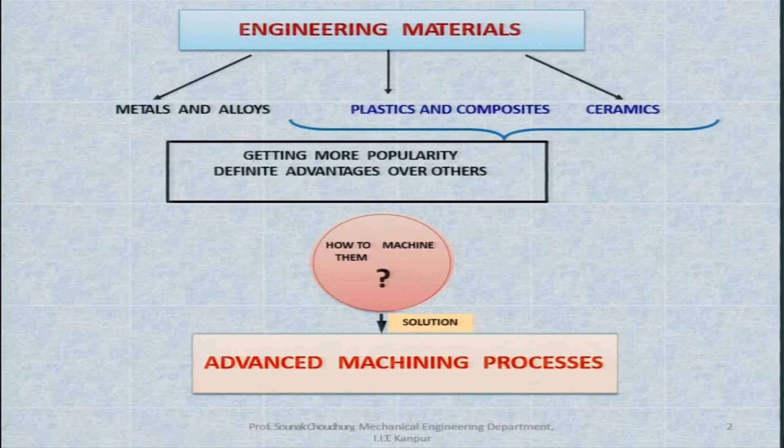So the solution that has been thought of is advanced machining processes - machining processes with some advanced technology or advanced concept of removal of extra material. When we talk about advanced machining processes, we are still removing excess material like in conventional machining. It is also a metal removal process, but there will not be any direct contact between the tool and the workpiece. This is the basic characteristic of advanced machining processes.

The second basic characteristic is that there could be different kinds of energies that we can use, apart from mechanical energy. Let us see it here.

Present day demand trends in industries like aerospace, missiles, automobiles, nuclear reactors, etc., require engineering materials with much superior properties - for example, ultra high strength, hardness, and very high temperature resistance. Such materials with these properties are very difficult to machine by conventional methods, indeed.

Now, what is happening is the workpiece material hardness is becoming much more than existing tool materials. We have certain limitations in tool material so far. When we have materials with much superior properties, the workpiece material hardness is becoming much more than the tool material hardness. So how to solve this problem?

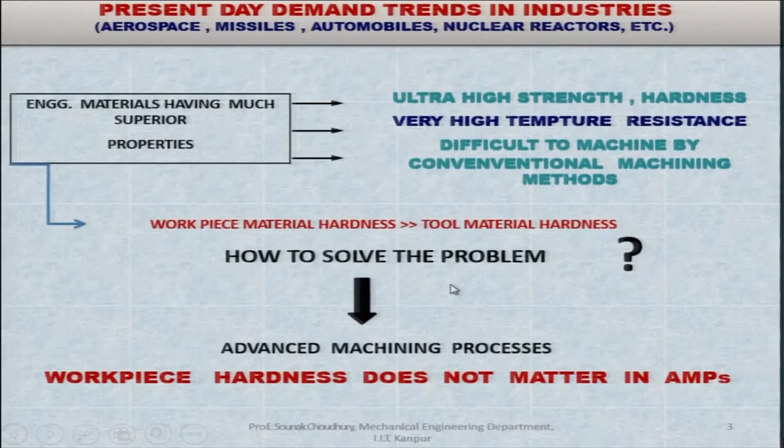Whatever is the hardness of the workpiece, irrespective of that, the machining can be done because of the technology, because of that particular technique that we will be using in the advanced machining processes. Let us see what kind of those.

Why do we need advanced machining processes? We have seen the limitations in conventional machining methods: workpiece hardness, surface roughness, 3-dimensional parts are very difficult to machine, complex geometries, intricacies. The increased workpiece hardness decreases the economic cutting speed, as we have seen in machining. As hardness increases, the cutting speed has to be decreased, and that lowers the productivity.

The rapid improvements in the properties of material, meaning the workpiece hardness, strength, etc., are increasing, as I said, with superior properties provided by material science people or metallurgists. So metals and non-metals like stainless steel, high strength, temperature resistant super alloys, like stellite, etc.

Then the tool material hardness has to be more than the workpiece hardness. We have discussed this, the tool material hardness should be 35 to 58% more than the workpiece material hardness. Then only can we have the interaction between the tool and the workpiece to remove excess material from the workpiece surface. That requires much superior quality tool materials, because the tool material hardness has to be much more than the workpiece hardness, 35 to 58% more.

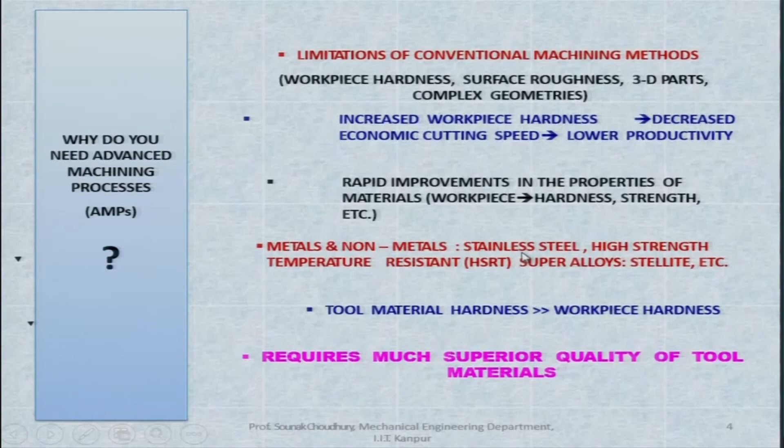Why do we need advanced machining processes? Continuing, product requirements also, apart from hardness and superior properties, include complex shapes. I told you earlier that if we have very intricate shapes, I will give you some examples of shapes that are very difficult to produce with conventional machining. Now, machining in inaccessible areas.

While discussing machining, I gave you examples like automobile internal combustion engine cylinders, for example. Internally, when the two holes are meeting, there could be burrs. If burrs are there, those small chips have to be removed. Removing those burrs by conventional machining is sometimes very difficult, and in many cases it becomes impossible.

Low tolerances, let us say 10 micrometer tolerance. Maintaining 10 micrometer tolerance is very difficult, because in that case the machine tool has to be very stable. There should not be any vibration or relative movement between the tool and workpiece other than what is desired. In case there is any small vibration, with amplitude around 10 micron or more, then this kind of tolerance cannot be achieved.

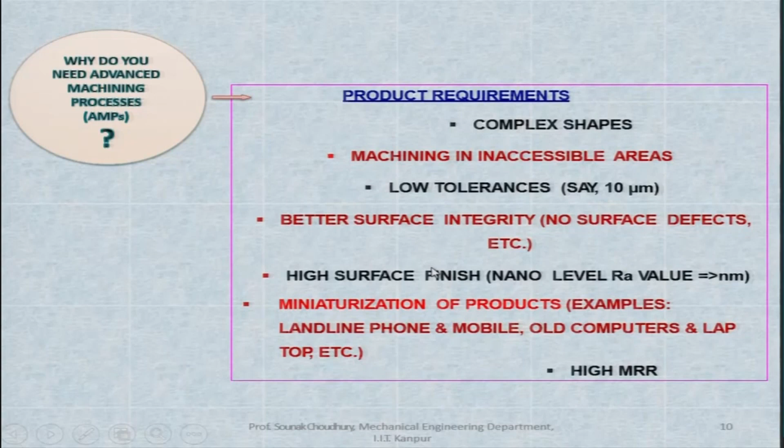We also need a high material removal rate, because we need a high production rate. Along with all those requirements, they are not always possible to satisfy with conventional machining, the normal machining we have discussed. So therefore we have to go for advanced machining processes. This is the justification for why advanced machining processes came into the picture.

High production rate while machining difficult-to-machine material. Difficult to machine material gives difficulty, as the name says, because its hardness is very high, tool wears out very fast, you need high force, high strain rate of deformation to be imparted, and so on. So for those materials we also need high production rate.

Low cost of production - cost should not be very high - and precision and ultra precision machining, that is nanometer machining. These are all the increasing demands in the industry, because we are progressing, we have to go faster now, we have to have miniaturization, we have to have more precise machines.

That requires material removal in the form of atoms and molecules. We are no longer limited to removing chips - although we say small chips, these are not in nanometers, they are in millimeters. These are big chips in comparison to when we talk about molecules and atoms.

So this is the solution - advanced machining processes - that we have to come up with to solve these problems that we face in conventional machining.

Now let us see some examples. Fabrication: when we talk about that, it means building of machines, structures or process equipment by cutting, shaping and assembling components made from raw material. So this is fabrication.

This fabrication may be meso or macro fabrication, or micro fabrication. Meso and macro fabrication is the process of fabrication of structures that are measurable and observable, the dimensions are bigger, visible by the naked eye. We can see them because they are bigger in dimensions, normally more than or equal to 1 millimeter - quite big for them to be seen by naked eyes.

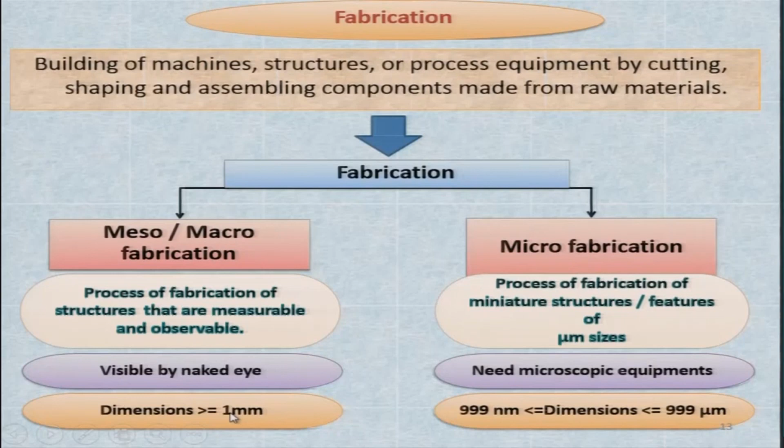But in case of micro fabrication, we talk about the process of fabrication of miniature structures or features of micron sizes, and that fabrication process needs microscopic equipment for measurement, because the dimension lies between 999 micrometers to 999 nanometers. Within that range the dimensions are less than 1 millimeter, and some of them are not even visible with naked eyes - you have to have a microscope to see them, because in that case the material is removed in the size of an atom or molecule.

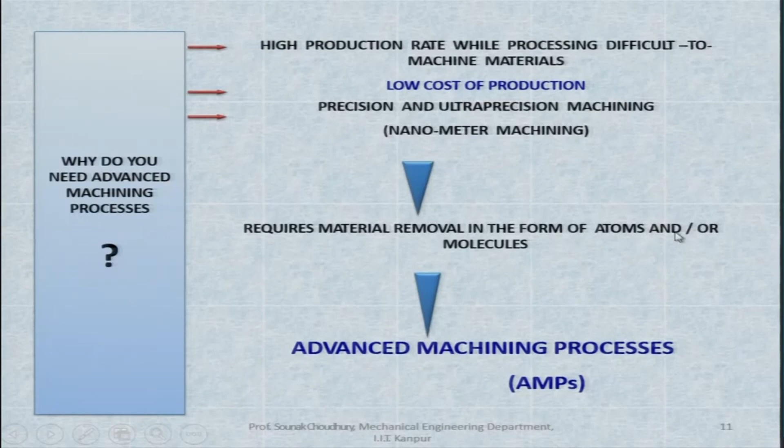Now, non-traditional machining processes overall can be classified based on the kind of energy used. In contrast to normal or conventional machining processes, we not only use mechanical energy, but can use different kinds of energy, because we now have to machine material of any hardness, which was not possible with conventional machining. Therefore, the kinds of energy used are mechanical energy, thermoelectric energy, and electrochemical and chemical energy - these are the three basic groups of energy used in non-traditional machining processes.

Now, in the mechanical category, this includes abrasive jet machining - a normal machining process, meaning it is still non-traditional, but not a finishing process, it is a machining process. Abrasive jet machining uses mechanical energy; details of that we will talk about a little later. Ultrasonic machining, as you can see by the name, uses ultrasonic frequency of vibration.

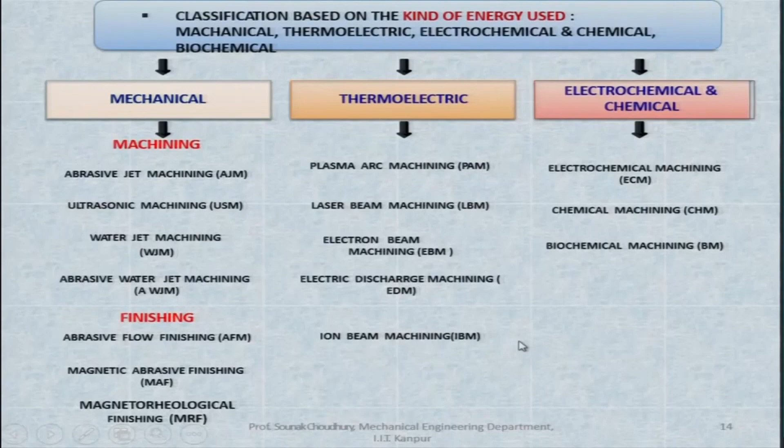These are some complex shaped workpieces, and you can see they are really intricate - for example, a turbine blade. This is the cross section of a turbine blade and this is the blade view. The shape is very intricate, so machining this kind of shape is itself a challenging job.

The turbine works with burnt gas at very high temperature, so overall it operates in an environment of very high temperature and pressure. These blades need to be cooled down, so cooling air is passed through holes, and those holes are very intricate. This is the theoretical profile that has been designed, and this is the actual machined profile.

The hole is like this - this is the experimental profile. The hole is not a straight hole, but curved like this. This is the kind of machining we have to do, and in a material which is very hard, for example an inconel material.

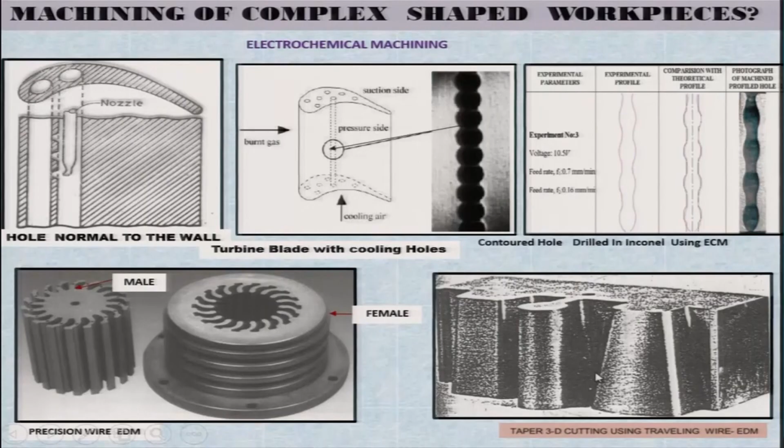This is part of a helicopter turbine. The holes here are also very complicated because the surface is not a straight cylindrical surface. These are drilled by electron beam machining, EBM. This is exaggerated, actually amplified under the microscope.

Each hole here has a diameter of 0.09 millimeter, and in 1 centimeter square there are 4000 holes, so the hole density is 4000 per centimeter square. The workpiece is stainless steel with thickness 0.2 millimeter. Just imagine how it would be possible to drill such holes in such a thin workpiece, in such a hard material like stainless steel, with such density of 4000 holes per centimeter square. The distance between the two holes is very, very small.

This can be done by electron beam machining, and this has been done by electron beam machining. The time taken is 10 microseconds per hole.

This is an even more difficult job because it is a 0.006 millimeter hole diameter, 6 micron. That means the hole density is 200,000 holes per centimeter square, whereas here it was 4000. The thickness is 0.12 millimeter, even thinner, and the time taken is 2 microseconds per hole. These are facts about processes also done by electron beam machining.

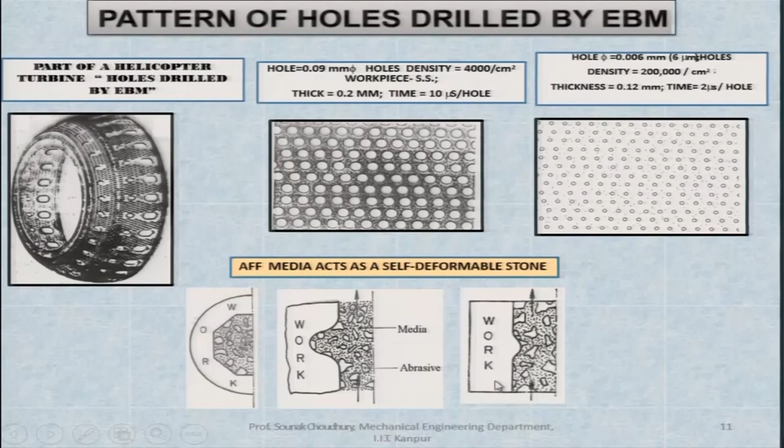Now, some important characteristics of advanced machining processes and machine tools: performance is independent of the strength barrier, as I said. The performance depends on thermal, electrical, magnetic and chemical properties of the workpiece material. So depending on the workpiece material properties, we will have the choice of a particular process and the performance.

These processes use different kinds of energy directly, all the energies that I have already told you about earlier. In general, the material removal rate is low, but the quality is better when comparing with conventional machining.

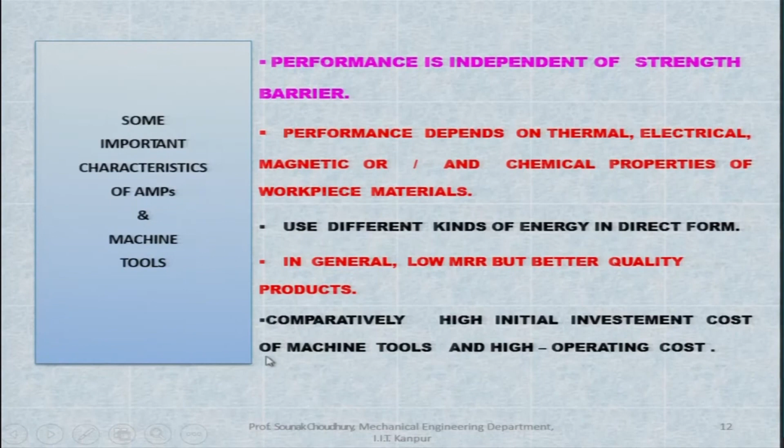Now, comparatively high initial investment cost of machine tools and high operating cost. This is a disadvantage because the cost will be more, and the production rate will be less, since the material removal rate is very low. The time taken, for example in electro discharge machining or electrochemical machining, is very high compared to conventional machining. But here the quality is better—the accuracy of machining, the overall quality, and surface roughness can be better.

Traditional machining, therefore, by definition is mostly based on removal of materials using tools that are harder than the materials themselves, of course.

New and novel materials, because of their greatly improved chemical, mechanical and thermal properties, are sometimes impossible to machine using traditional machining processes. The traditional machining methods are often ineffective when machining hard materials like ceramics and composites, or machining under very tight tolerances, as in micro machined components, for example.

Therefore, the need to avoid surface damage that often accompanies the stresses created by conventional machining. In conventional machining, very often because of the entangling, particularly of these chips, or the high friction between the workpiece and the tool and so on, such damage occurs. Those can be avoided in case of unconventional machining.

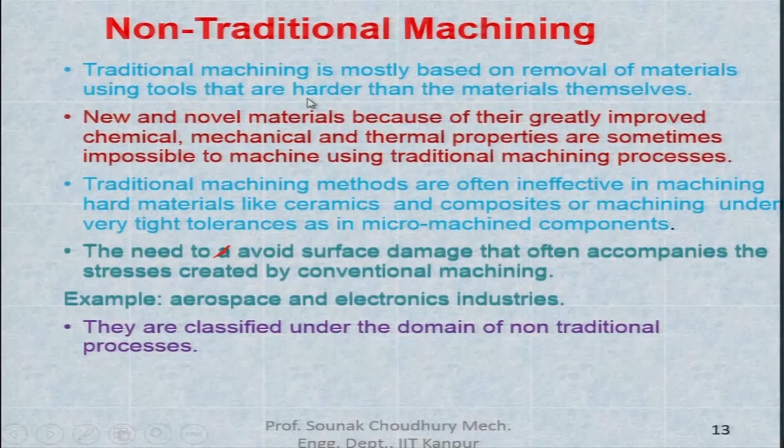Now the classification, once again, this can be classified according to the source of energy used to generate such a machining action: mechanical, thermal energy, chemical and electrochemical. I have shown it to you in a table.

Mechanical is erosion of the work material by a high velocity stream of abrasives or fluids, or both. This is an example of mechanical energy, when we have the impinging of abrasive materials, the grains — aluminum oxide, silicon carbide grains, diamond grains — those very hard particles, they impinge the surface with mechanical force and have an impact, and then remove the material.

It can be thermal energy. The thermal energy is applied to a very small portion of the work surface, causing that portion to be removed by fusion and/or vaporization of the material. The thermal energy is generated by conversion of electrical energy, and examples given are electron beam machining and laser beam machining.

So we pass electricity in a circuit, and we convert this electrical energy to an electron beam, for example, to create a plasma arc, and so on. Those beams are then used to create very high temperature in a very small area, which can actually melt and evaporate the material from the workpiece surface.

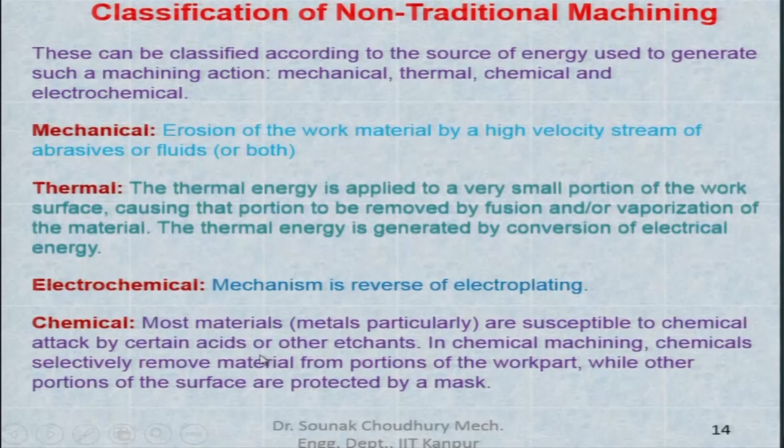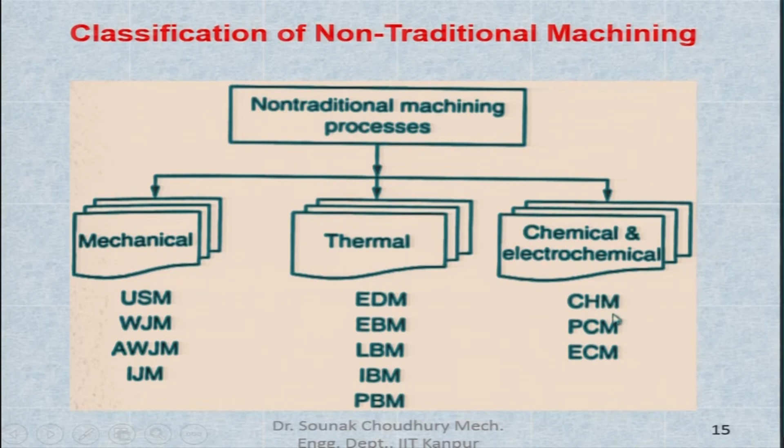So in one word, non-traditional machining processes can be classified into categories using different kinds of energies: mechanical, thermal, chemical, and electrochemical. In mechanical, we have ultrasonic machining, water jet machining, abrasive water jet machining, and ice jet. Thermal includes electric discharge, electron beam, laser beam, ion beam, plasma arc, and so on. Chemical includes chemical machining and electrochemical machining.

So mechanical machining — ultrasonic machining and water jet machining — these are examples of mechanical machining, meaning non-traditional machining using mechanical energy. They are typical examples of single action mechanical non-traditional machining processes: ultrasonic machining and water jet machining.

The machining medium is solid grains suspended in an abrasive slurry in ultrasonic machining, while a fluid is employed in water jet machining. Abrasive slurry means abrasive mixed with some kind of fluid, and this entire fluidic material flows between the tool and the workpiece, since there is no direct contact between them as in traditional machining processes.

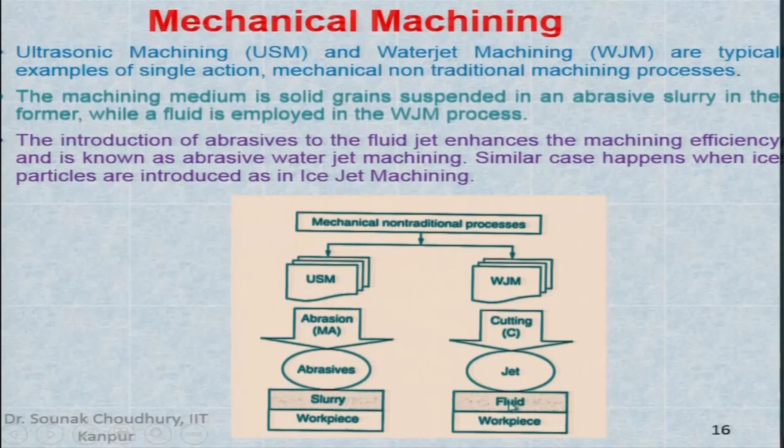In thermal machining, similar to the previous table, thermal non-traditional machining processes remove material by melting or evaporating the workpiece material. Many secondary phenomena occur during machining, such as micro cracking, formation of heat affected zones, striations, etc. These phenomena happen during machining, and because of them the material is removed through these mechanisms.

Material is removed, again, by this thermal process, so it can melt and evaporate. In between we can have phenomena like micro cracking, formation of heat affected zones, striations, and so on.

The source of heat could be plasma, as during electro discharge machining, or photons, as during photon beam machining like laser beam machining. Electrons in electron beam machining, ions in ion beam machining, and so on. These are different heat sources, but all of them create very high temperature in a very small area, so that high temperature melts and evaporates the material instantaneously irrespective of the hardness of the workpiece. That is how material is removed, by melting and evaporation.

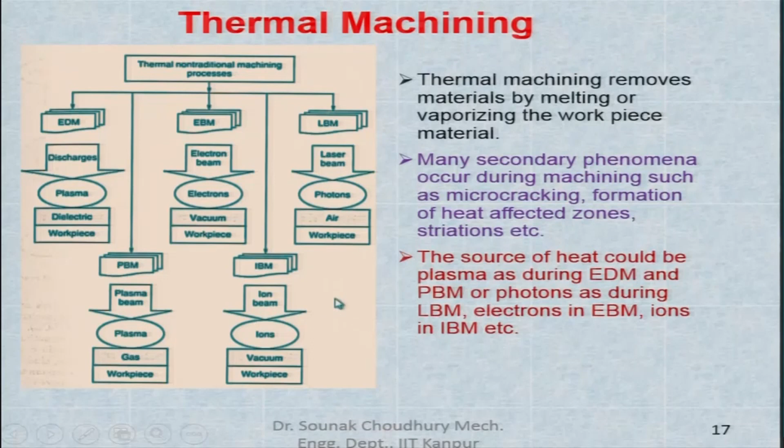Chemical and electrochemical machining have the following mechanism. These are the representative electrochemical machining processes. Here electrochemical dissolution is the mechanism, and ions are used as the source, with electrolyte used for the interaction with the workpiece.

In chemical machining, chemical dissolution is there, where ions are used to etch the workpiece, through interaction between these ions and the workpiece by etching. Chemical milling and photochemical machining, also called photochemical blanking, come under chemical machining, and all use a chemical dissolution action. So this is chemical dissolution versus electrochemical dissolution, the mechanisms of material removal. In the thermal case, we said it is melting and evaporation.

In case of electrochemical machining, it is electrochemical dissolution. In case of chemical milling or photochemical machining, it is chemical dissolution, using ions in an etchant, to remove the machining allowance from the workpiece material.

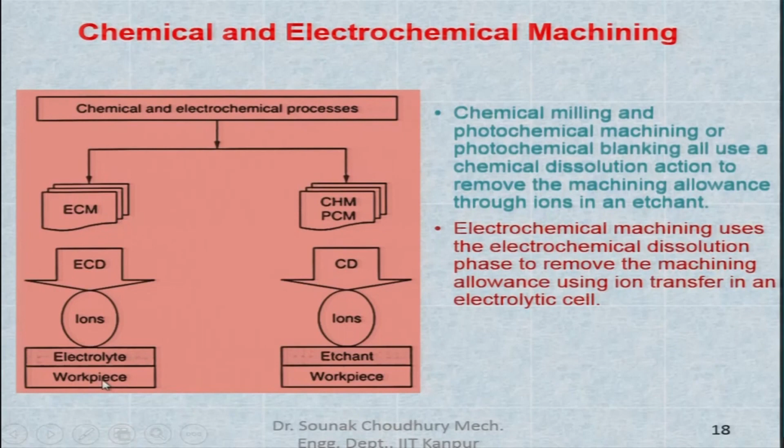Electrochemical machining uses electrochemical dissolution to remove the machining allowance using ion transfer in an electrolytic cell. The ions are transferred, and through this electrochemical dissolution, material from the workpiece is removed.

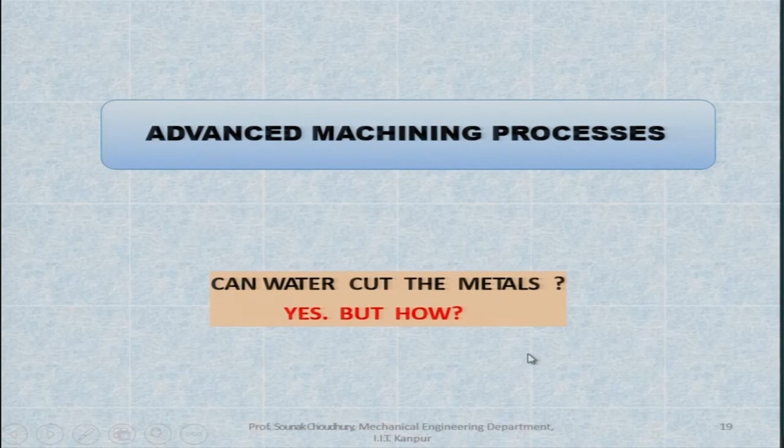In these advanced machining processes, it is interesting to find out if we can use all kinds of sources, for example water. Can water cut metals? The answer is yes, but how? Here is how: water jet machining, abrasive water jet machining, and abrasive jet machining.

We can see that if water is forced at a very high speed through a very narrow nozzle with a small diameter, materials like wood and soil can actually be cut.

Now, if we use sand and water together, harder materials like stone or aluminum can be machined, and material can be removed from harder surfaces than wood and soil, because of abrasive water jet machining. The high force of water along with the impinging of hard abrasive particles into the surface helps remove more material.

For example, abrasive jet machining uses only air and abrasives. So here we have stone and aluminum machined with water and sand, or with abrasive, sand, and air.

Sand and air, or water and sand, can create brittle fracture. When the abrasive material impinges on the workpiece surface, the surface can be fractured, and if it is a brittle material, it fractures easily.

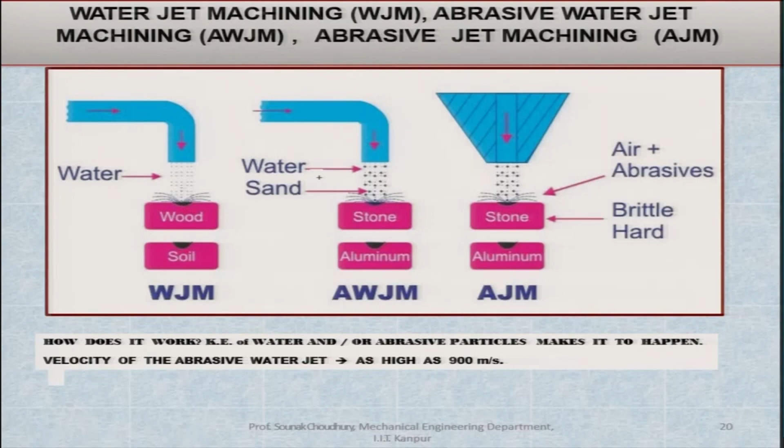How does it work? Water and abrasive particles make it happen. The velocity of the abrasive water jet can be as high as 900 meters per second, which is very high speed. In fact, if that jet hits a human being, it can actually damage the skin and flesh.

If you remember, sometimes riot police use a water gun, where high speed water jets are used to disperse people, to scare them, not to damage them. But nevertheless, if it falls on a human being, they cannot sustain that force and can fall down, so they run away. This is meant to disturb people so they do not gather together.

Water jet cutting in detail is also known as hydrodynamic machining. This means the machining process or removal of excess material by hydrodynamic force, using a fine, high pressure, high velocity water jet directed at the work surface to cause cutting, causing material removal.

If you see the diagram here, this is the workpiece. Here is the nozzle, and there is a valve to regulate the pressure of the water, with the source of high pressure water coming from here. The valve regulates that pressure and sends the water to the nozzle.